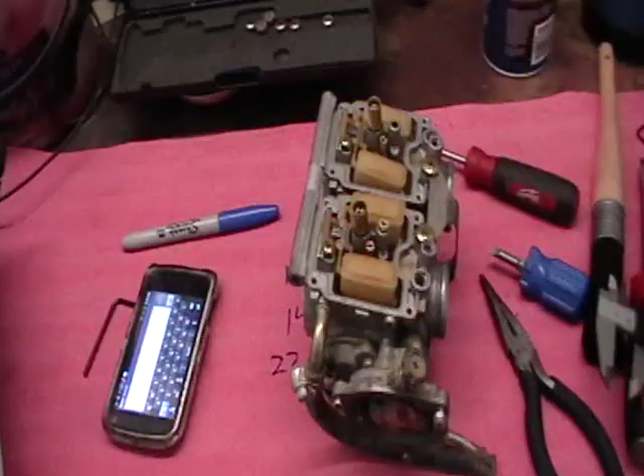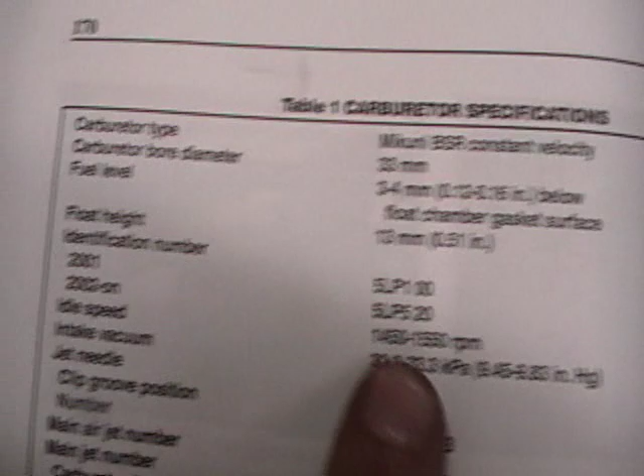Okay, so we're gonna get down to this. Looking in here, it shows that the float height should be 13 millimeters. I don't know if that shows very good. Anyways, 13 millimeters. Okay, so I'm back at it. I figured I should make this a little more clear.

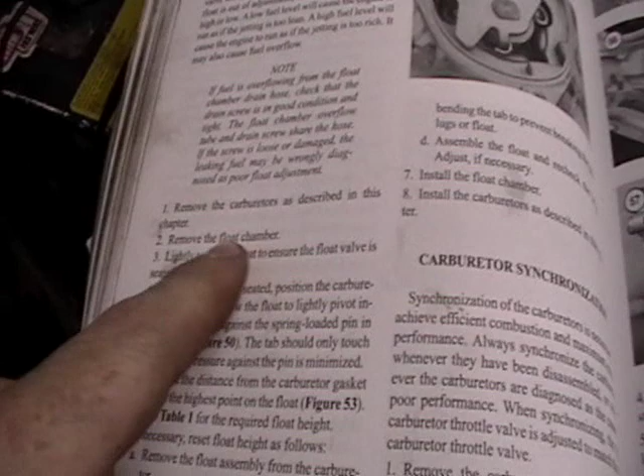And I stopped going on memory. I busted this out. So it says remove the carburetor, blah blah blah. Okay, remove the float chamber, which is basically the bowl. Lightly touch the float to ensure the float valve is seated. So I'm just gonna do like that. Push on that, just make sure that they are seated. Okay.

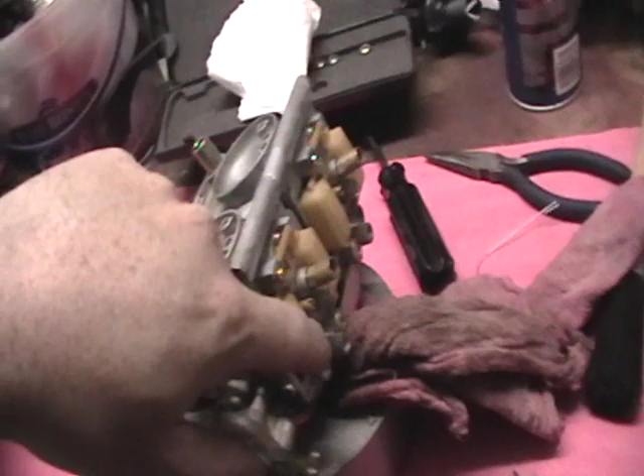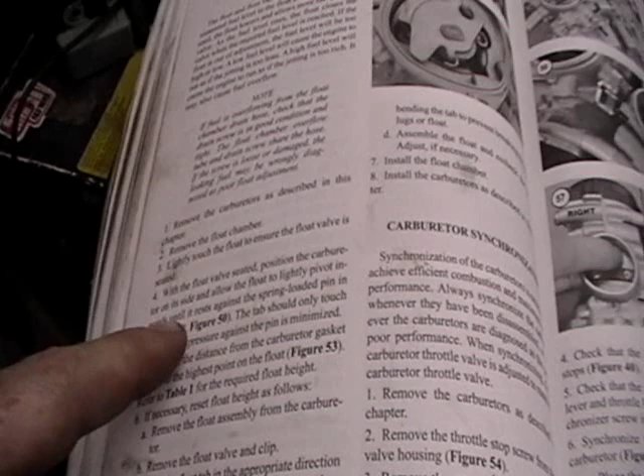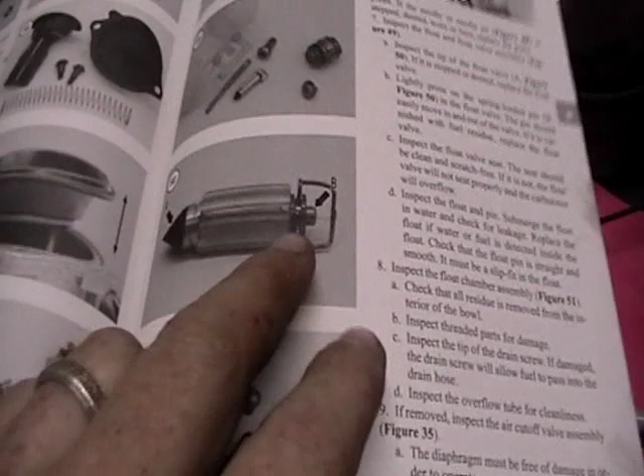And then, float valve seated, position the carburetor on its side and allow the float to lightly pivot inward until it rests against the spring-loaded pin in the valve. Oops. Figure B. Okay. Or figure 50B. So there you go. Push that.

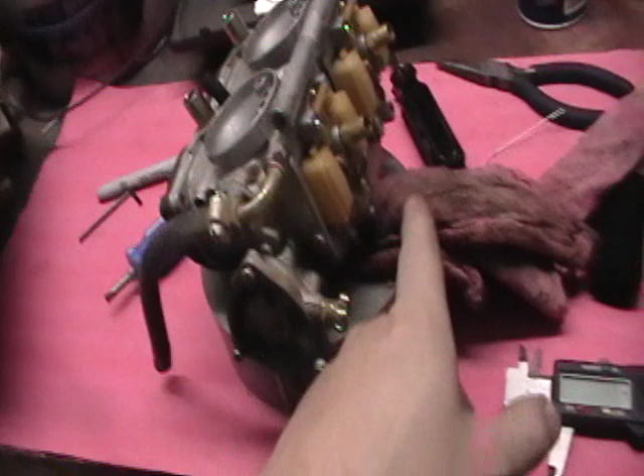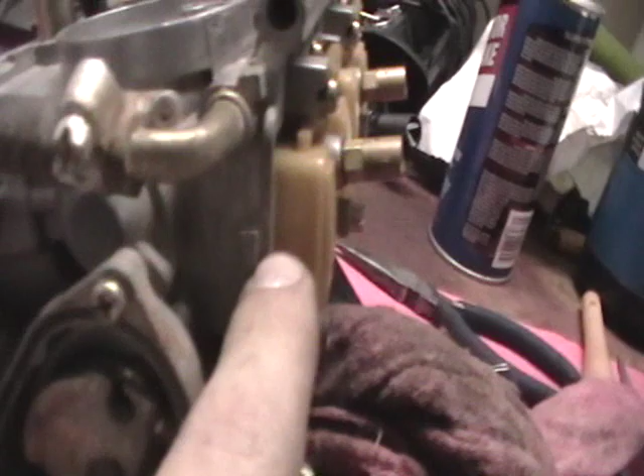I guess I pushed that all the way in, and then I adjusted it with this. Pushed it in to make it more this way, pulled it out to make it more this way, but it's just barely pivoting. Then you take the measurement from here to the top of there, and to adjust it, you just bend this little tab. Bend that tab in or out. So, all right. Thought I should clear that up, so I'll finish doing this and get back with you.

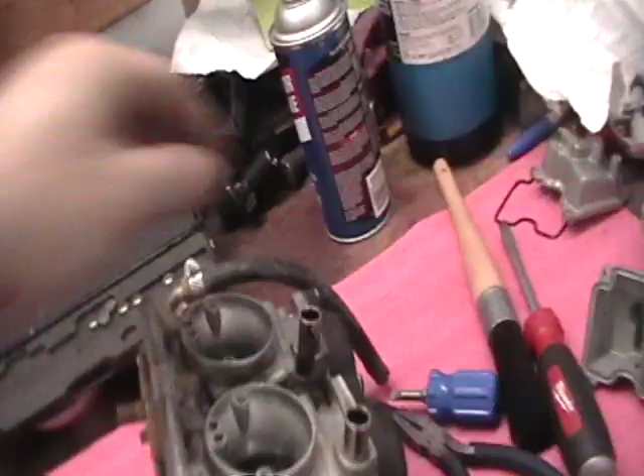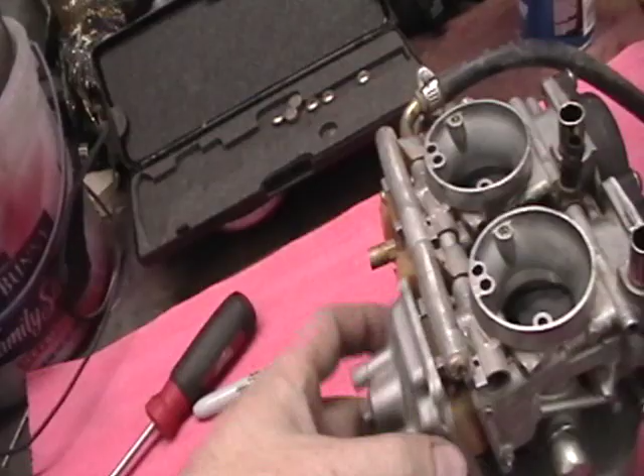And I'm going to put a little bit of gasoline in here, and I will put a clear tube on this tube right here. This is called the clear tube method or something like that. But anyways, you grab this like this, and you'll have that tube come from down here and lift it up, and then you'll loosen the drain hole up, and that fluid will be somewhere in here.

And what you want is right here, you want it 3 millimeters below the top of that. That's where they say it's best to have it at. So yes, I'll get back to this, finish adjusting the best I can, and go from there.

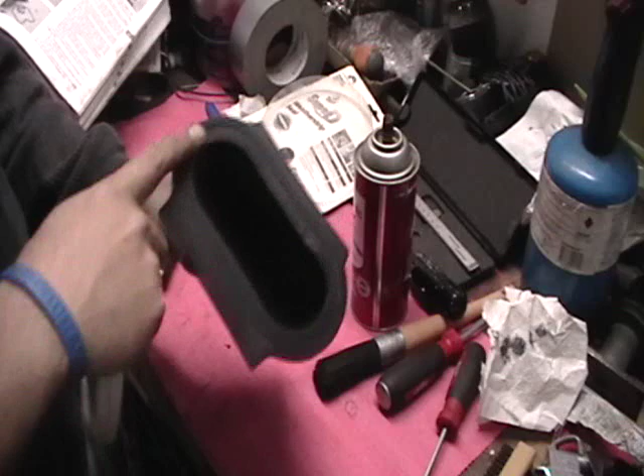Alright, so I got it all cleaned up. Carburetor's put back on. I couldn't do the clear tube test because I didn't have a tube small enough to do that. So, oh well. Alright, so this is just regular weather stripping. And I cleaned the filter off real good. I was going to put it on the box, but I figured this would be a lot easier to do.

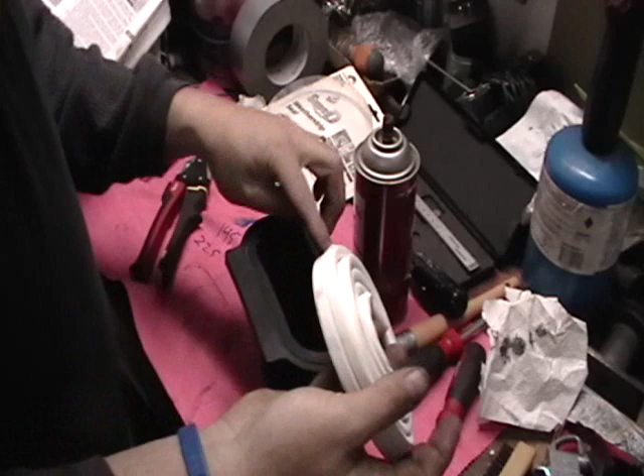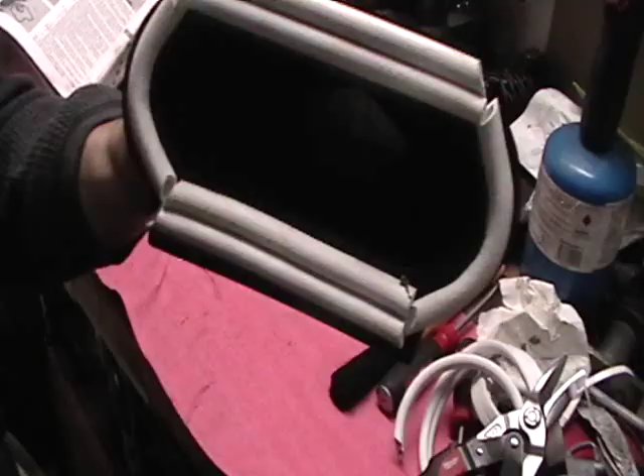So just basically going to lay it out, and this is a double seal thing. So I think on the top I'll do 2 of them, and around the corners I might just do 1, but we'll see. You won't have to watch this whole thing, so I'll just pause it, get it done, and get back with you. Alright, so here we go. Let's go put it in.

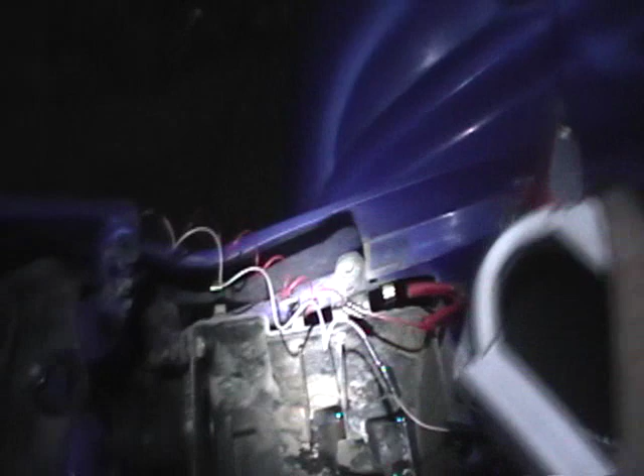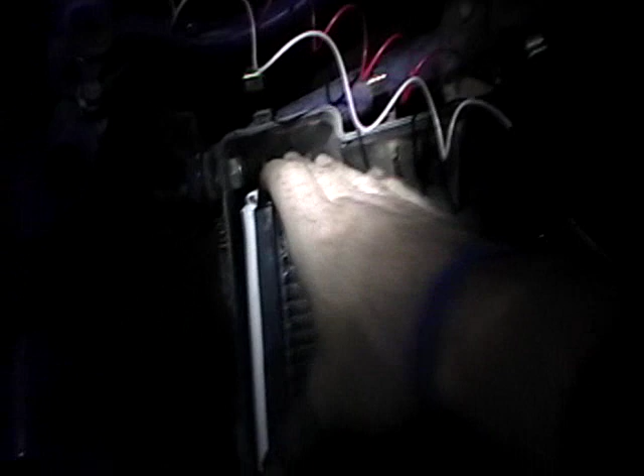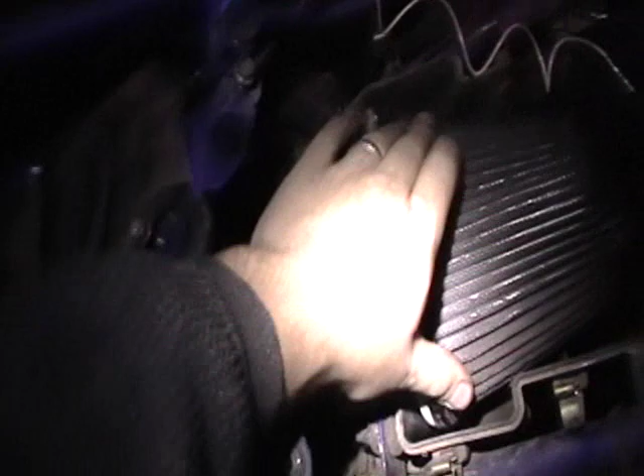So as you see, I did that. Push it down flat. A little headlamp. Alright. There's a little lip that it goes down into. So yeah, once the top lid gets on, that should smash that in there a lot better. At least that'll cover up that gap, once I put this in here straight anyway. There it goes. That's how that'll be in there.

So, alright. Still got to hook the throttle up, the choke, put the gas tank on, and everything else. So still got a little bit to go, but yeah, got a little bit more gas out. That stuff's horrible. So,